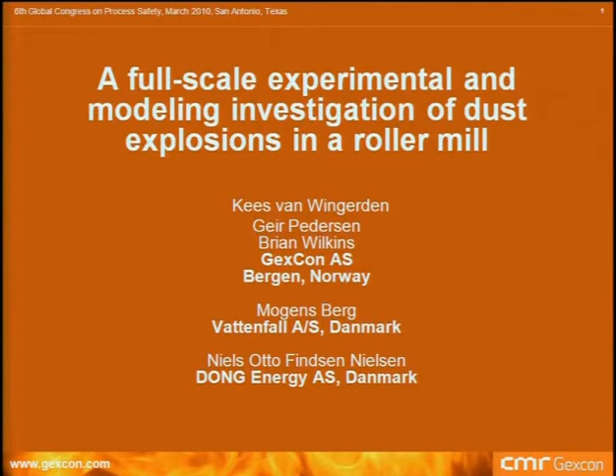I want to say thanks to my co-authors, Geir Pedersen and Brian Wilkins from GEXCON, but also Mogens Berg and Niels Otto Nielsen from Vattenfall and Dong Energy, respectively. Vattenfall and Dong Energy are both power companies. Vattenfall is the Swedish word for waterfall, and they started with hydropower. And Dong Energy, Dong sounds like a strange word as well. It just means the Danish oil and natural gas company, so it's an abbreviation. Nothing special. So there goes everything exotic. I'm sorry.

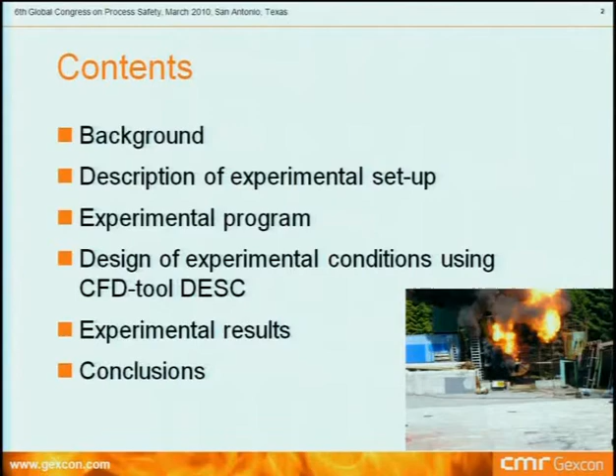I want to give you a little bit of background on why these experiments were performed. I'll give you a description of the experimental setup and the experimental program. We have done some CFD work to design the experimental conditions used in this program. And then, of course, I want to share some experimental results with you and end up with some conclusions from the work we've performed.

As you know, biomass is becoming more and more popular as a fuel for power generation applications to replace coal.

However, grinding of biomass, and the same accounts for coal, represents a hazard due to the presence of both flammable dust and possible ignition sources due to mechanical sparks, hot surfaces, and smoldering combustion. This smoldering combustion may even come from the outside, because the material is stored on its way to the mill at several locations. First it is stored in a ship, brought to a terminal, then taken off the ship and brought into a huge storage silo, and from there it is transported into another silo which is on top of the mill. So there could be smoldering material coming in from the process.

preceding the roller mill. But smoldering combustion can also be generated inside the mill. These companies had some incidents in the roller mill, and on the basis of those incidents, they decided to protect the mill against explosions by using suppression, and at the same time isolation.

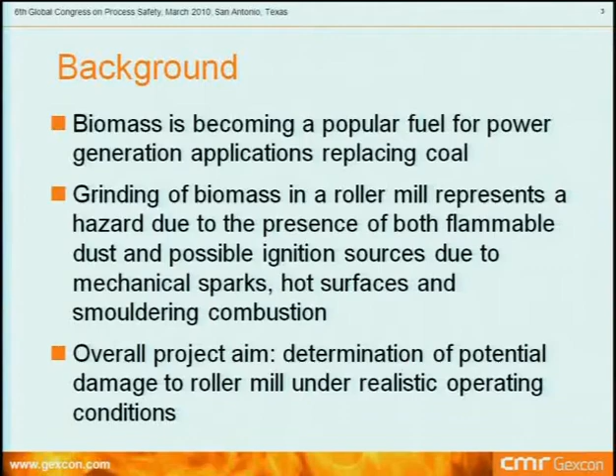We started doing these experiments on their behalf. We have a site outside of Bergen at the island of Sotra, and the power companies made available a full-size Loesche roller mill. It was one which was used in the past, no longer being used anymore, and the grinding capacity of this mill was 36,000 kilos of coal per hour. That was what it was designed for.

The basic parts of the mill are the mill room, and I'll show you some pictures, the classifier area which is on top of it, and on top of that again there is a top with a coal feeder pipe and coal dust pipe. The coal feeder is where the coal enters the mill, and at the same location in the top there are pipes which feed the ground dust towards the burners.

This mill on the experimental site was connected to a 5.1 cubic meter coal feeder via a pipe which was 0.6 meter in diameter and 3.35 meters long.

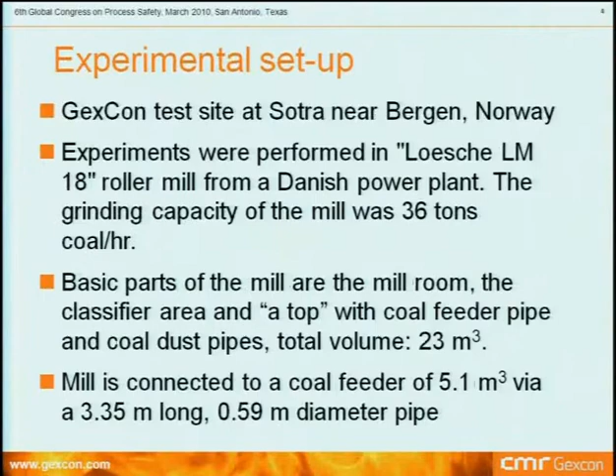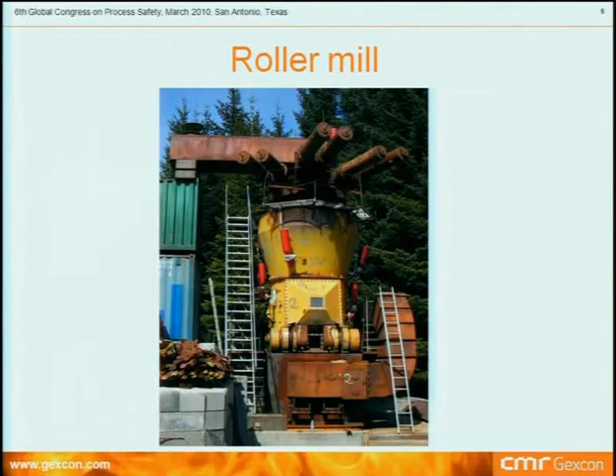So between the mill table, in the bottom of the mill, and the mill housing, there is an open clearance, a throat around it, which has a total cross-section of approximately 0.4 square meters. These coal dust outlets to the burners are 550 millimeter diameter, and as you could see on the picture, 2 meters long. We put this diaphragm in it to simulate long pipes.

On top of the coal feeder, there is an opening which simulates the connection to the silo, as you saw in the picture as well. There were also primary air ducts, fixed to the mill foundation underneath the mill table, and there the primary air is coming in, which is hot.

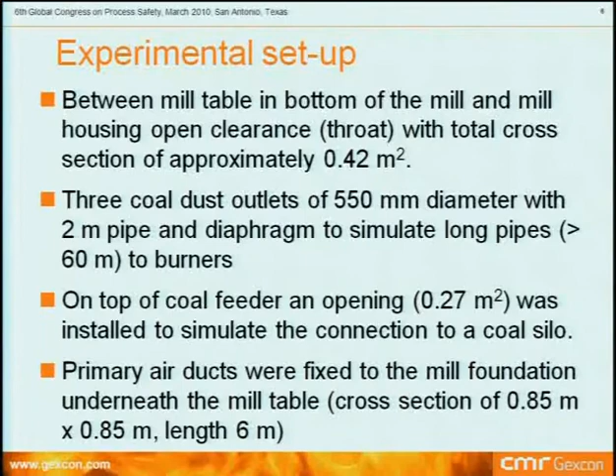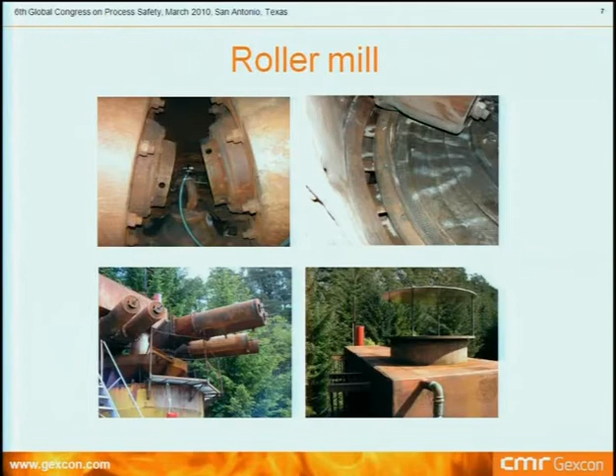We wanted, of course, to use the mill under as realistic conditions as possible. We would need a small power plant to run the mill, and in fact we could just use the mill itself to generate coal dust, enough wood dust to do it ourselves completely. So we would have a small power plant ourselves, but that was too expensive.

So we decided to inject the dust as you would normally have in tests, like in a 1 cubic meter vessel or 20 liter sphere, from a vessel which is then pressurized, and then the dust is injected pneumatically into the mill. For that we used 20 liter bottles, which have a fast-acting valve to open them.

This fast-acting valve is in fact opened by a torque motor, which allows us to reuse the vessels all the time, so it's easy to refill these vessels. They are in fact part of a suppression system.

We did simulations with a CFD code called DESC, from which we chose a 900 millisecond delay time to simulate, I'll say, the worst case operational conditions which could prevail in the mill. I'll show you that in a minute.

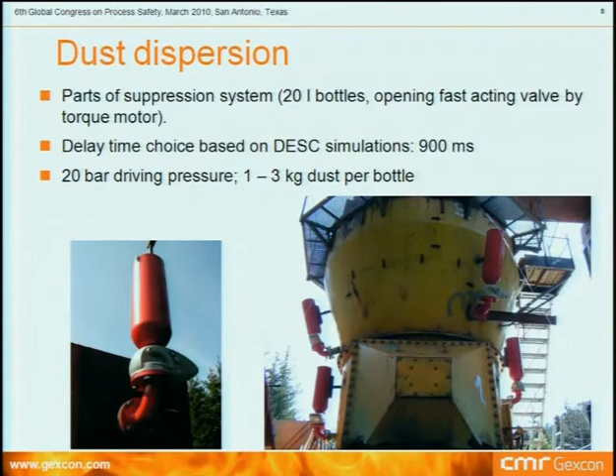And then we had a 20 bar driving pressure, and we use typically 1 to 3 kilograms dust per bottle. So here you see the bottles connected to the mill, at several locations. Here is a closer picture of one of those bottles.

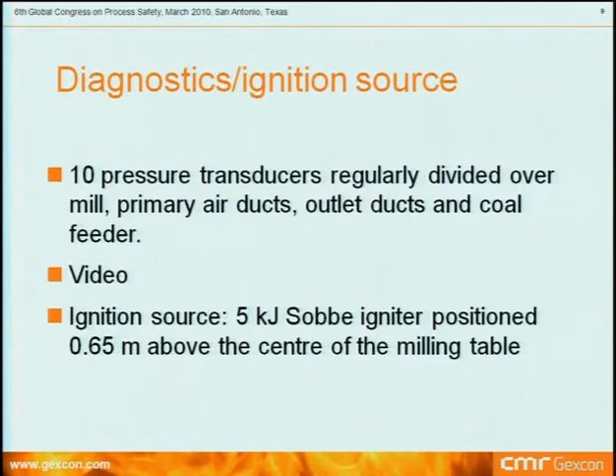We had 10 pressure transducers regularly divided over the mill. We used video, and that was basically it, what we used to diagnose the explosions. We used a 5 kJ Sobbe igniter, which was positioned 0.65 meters above the center of the milling table. You saw a picture of that.

We used coal dust with these properties. It had a KST value of, varying a little bit, 118 to 145. We did several tests during the program to verify the KST value; it varies a little bit. The moisture content of the dust is low, 2%, which is typical for the dry coal going to the mill, because the mill itself is also used as a dryer.

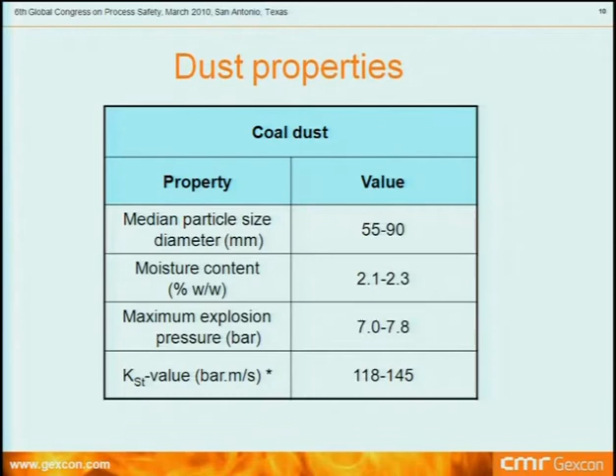As a matter of fact, by using the primary air, which is hot, it's warm air. The maximum explosion pressure of the dust is 7 to 7.8, and we have a typical median particle size diameter varying between 55 and 90 microns. It's microns, not millimeters - that μ turned into a normal M again.

The same happened here. These are the wood dust samples which we investigated, and we had two sources of the dust. The second source is in fact coming from a power plant, whereas the first dust is coming from a furniture fabrication plant.

Which appears to be relatively representative for the dust from the power plant as well. We tested this dust from the power plant for every test we performed, and we ended up with three classes: one where the KST value was close to that of coal dust, one where it was slightly lower, around 90, and one where it was really low, 31 to 55. We determined all these in a 20 liter sphere.

The median particle size diameter is varying, which is the reason why we found these variations in KST value. Also the moisture content is changing, and as you can see, it also varies in the direction of getting a lower KST value because it's a heat sink, the moisture.

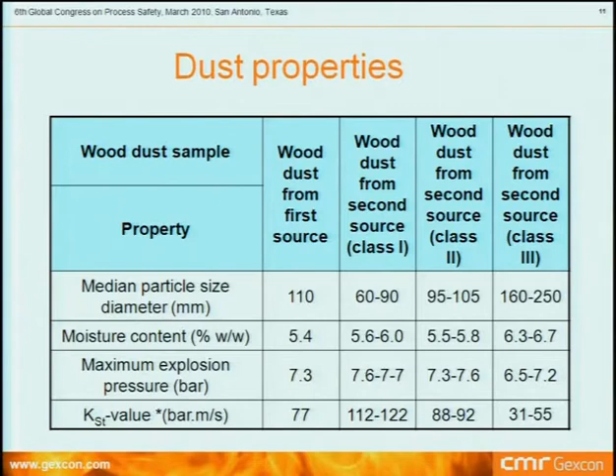These DESC simulations we performed - DESC is a CFD code to simulate dust explosions. The starting point of this code was FLACS, which is a dedicated CFD tool for gas explosions. The only thing we really changed was the combustion model, and we use equations which are adopted for gas explosions, and we can use those for dust explosions as well, as Derek Bradley showed.

The combustion properties are directly obtained from 20 liter sphere tests. And there are some submodels in this DESC code which allow us to describe radiation, the effect of radiation on flame propagation, dust lifting, and also explosion suppression.

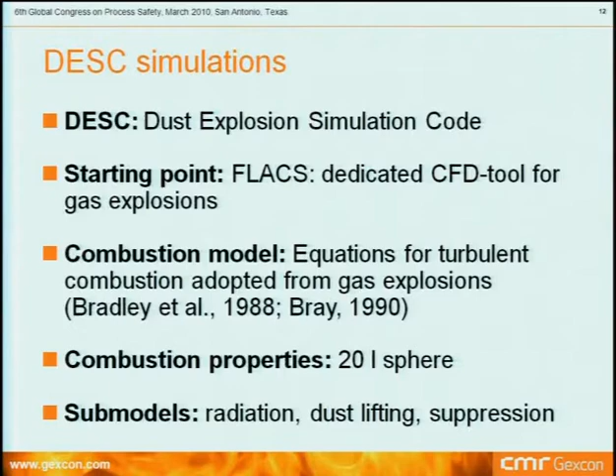This is the geometry of the DESC simulation. The DESC simulations were performed to choose the optimum, or the most realistic optimum, process conditions. We couldn't do experiments with the mill working as it would be used in a power plant, so we tried to simulate that with dust injection. This is the geometry representation of the mill inside DESC.

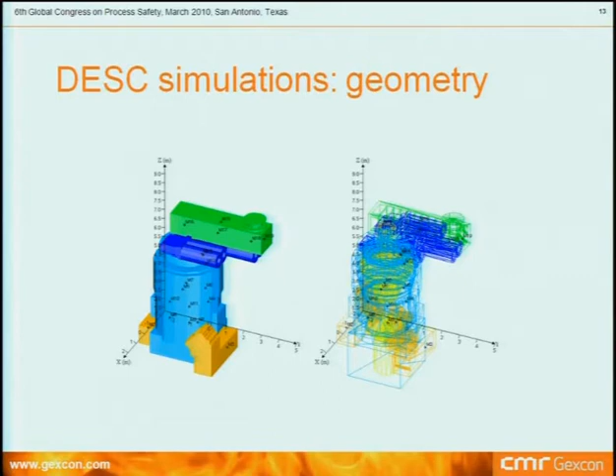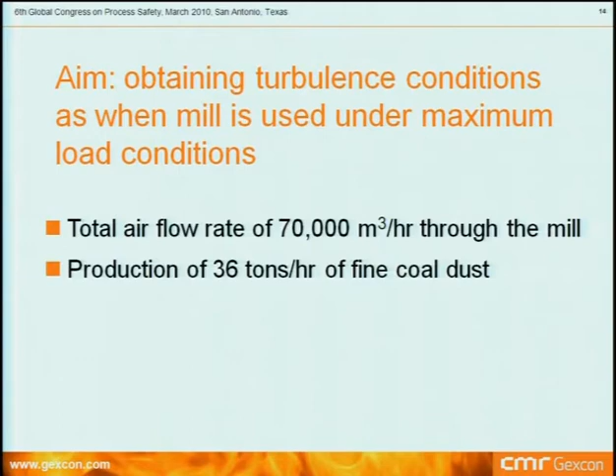The aim of this work was just to obtain the turbulence conditions as prevailing when the mill is used under maximum load conditions. That is basically 36 tons per hour of coal, and at the same time a total airflow rate through the mill of 70,000 cubic meters per hour, which is about 500 grams per cubic meter dust load. Please bear that in mind.

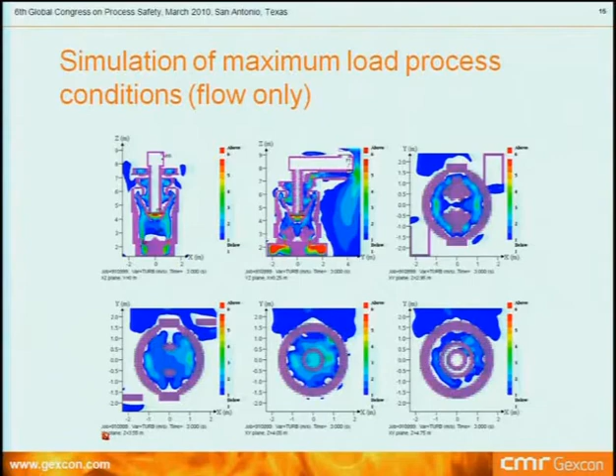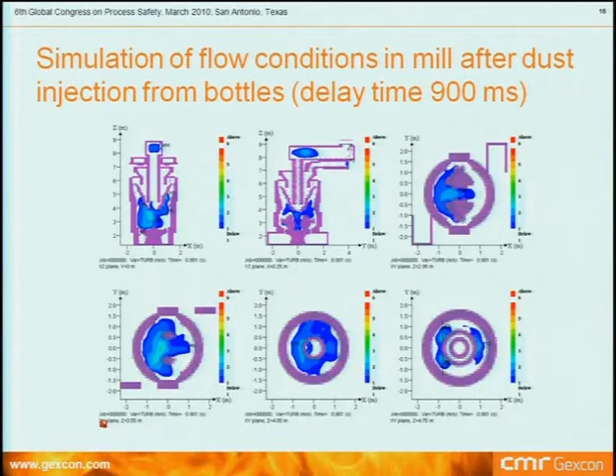Look at the colors, remember the colors. If we then do it again with dust injection, you see that the colors are similar. However, there's nothing outside, of course, because we didn't simulate anything outside of the mill. At the same time there are some differences, but this is the turbulence level after a 900 millisecond time delay, which is close to what was seen in the other simulation. That's why we chose 900 milliseconds.

Now I'm going to share some experimental results with you. We varied the dust cloud size, the location, and the dust reactivity, as you saw. Especially for the wood dust, we were more or less forced to vary the dust reactivity. We also varied the dust type because we did both coal and wood, and we investigated some venting parameters. At least those are the results I'll share with you now.

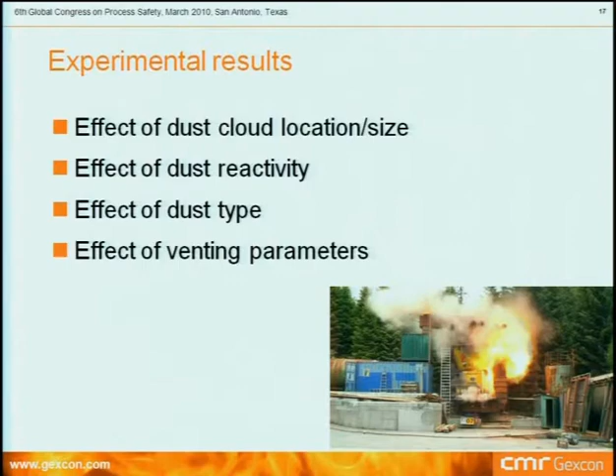Some general observations: we could not do experiments at 500 grams per cubic meter because we saw that we were going to ruin the mill, and we wanted to do a full program. So we stayed at 350 or lower - that was the maximum concentration we could run the tests with, because otherwise explosion pressures would have been too high. We had some minor damage, and if we had gone higher we would probably run into trouble. We wanted to keep the mill for future programs, if any.

We saw big differences between coal dust and wood dust, probably due to the dispersion characteristics of the dust, and I'll show you why. It looks like coal dust rains down more, whereas wood dust stays more in the air and is easier to disperse, despite the particle size distribution being more or less the same. So it's the relative density of the particles themselves, the fuel, which is probably an important parameter. In addition, we had big variations in the wood dust, so we determined the KST value for every single test.

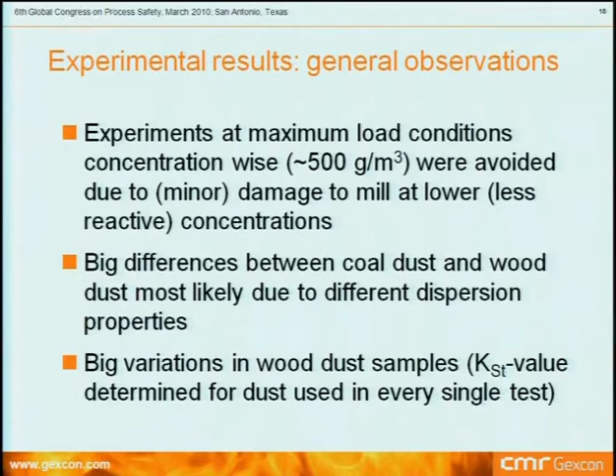Now we want to show you some examples, and fortunately the sound is not very good, so I'll try to get the microphone close to the PC. I think the speaker is there. Are you going to stay there? Yeah, I'm going to show you many things. I do it only for you, Kees.

I appreciate that. But this is the first test where we had a cloud only in the milling part of the mill, and it is coal dust only.

I guess it's coming from here. Okay, well, I'll just take it again. Well, we can try it once more, perhaps it's better.

No, this is a rather mild explosion.

So now we have dust, this test we show now. Dust is everywhere inside the mill, so it's in the lower part where the first one was, but it's also inside the classifier part and in the coal feeder.

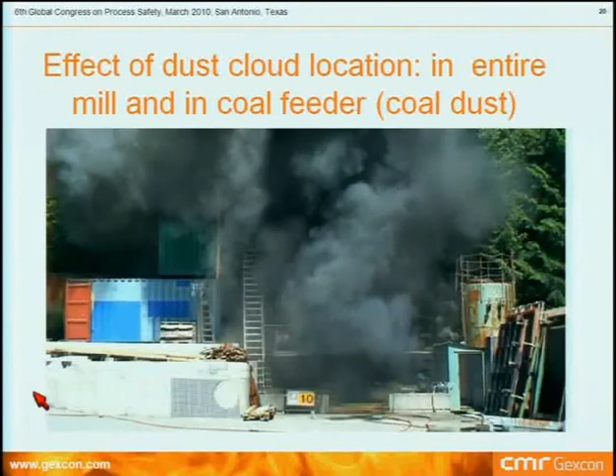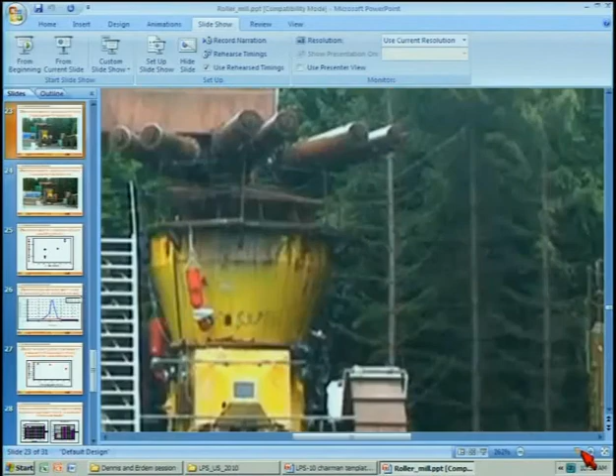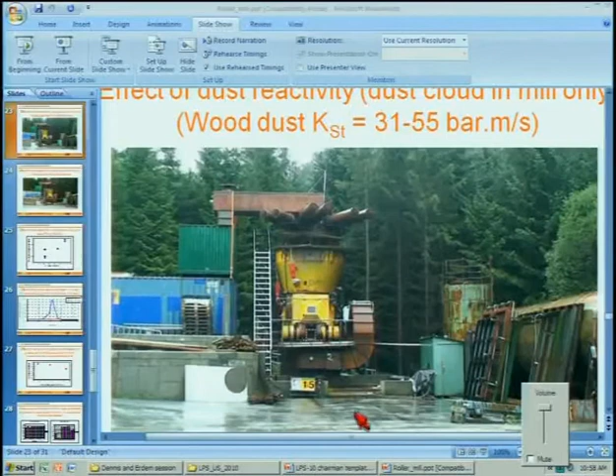I think I understand what is going on. May I? No, I want to get out of the presentation. If we pull that up... no, there's something else. Is there a sound here somewhere? Here, oh it's maximum, okay. Doesn't work, okay, it's a pity. Oh here, there's a button there, we didn't know that. Okay, well it didn't work, sorry about that, I could just keep it over here. It's always nicer when you hear big bangs. As a pyromaniac, I can just assure you that is true.

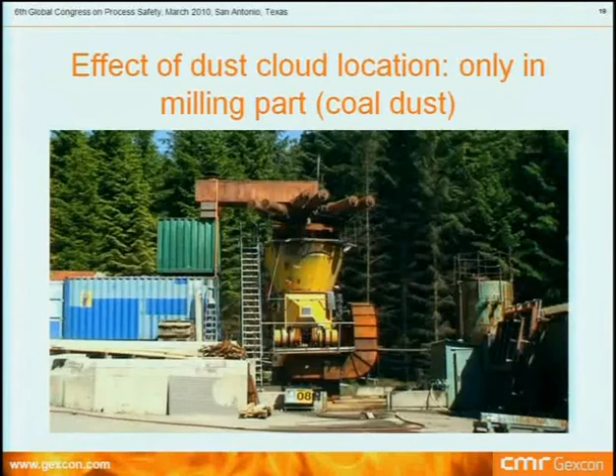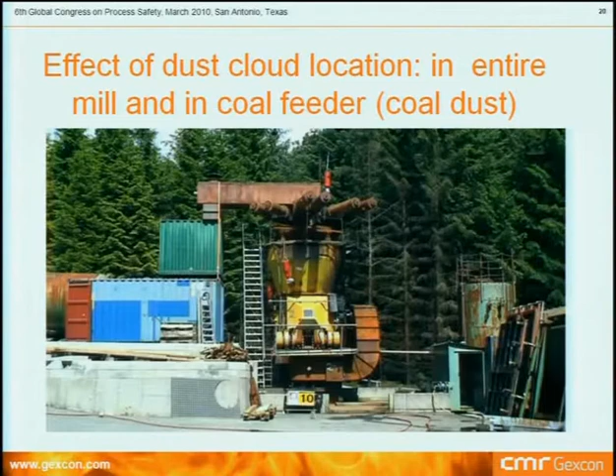Just see where we are now. So we saw the difference between having dust only in the low part of the mill, and the second one where we had dust everywhere inside the mill as well, inside the coal feeder as well.

Here are the pressure measurements of these three tests. One where we had dust only in the lower part of the mill, that is the red one. One where we had dust in the classifier area as well, so the dust cloud was inside the entire mill but not inside the coal feeder. And the last one where dust is also in the coal feeder. You see there is a huge difference - here we measure up to 1.35 bar inside the mill.

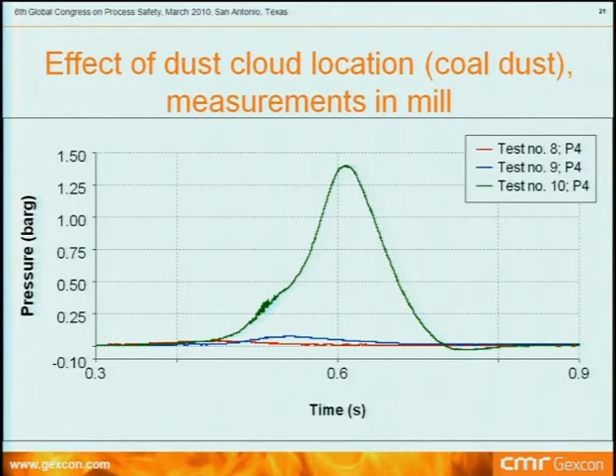So it gets complex and interesting when you do this, and this is happening in many tests. But it's also interesting to see that the coal is giving hardly any pressure inside the mill if we have only a cloud inside the mill. It's completely different from wood dust, because then the pressures are more or less similar in conditions similar to test 9 and test 10, where we have material inside the mill only and inside the mill and the coal feeder.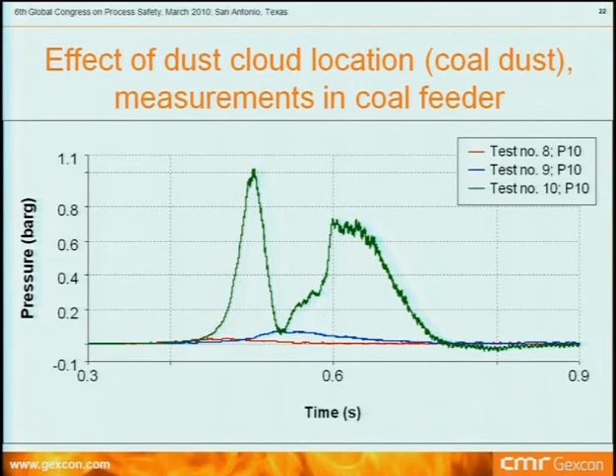So this different behavior must be due to the behavior of the particles themselves, the dispersion behavior of the dust. Now we'll see some experiments done with coal dust and wood dust. First, this is wood dust, where we will just vary the dust reactivity - wood dust only inside the mill for every test. Unfortunately, you don't hear the sound.

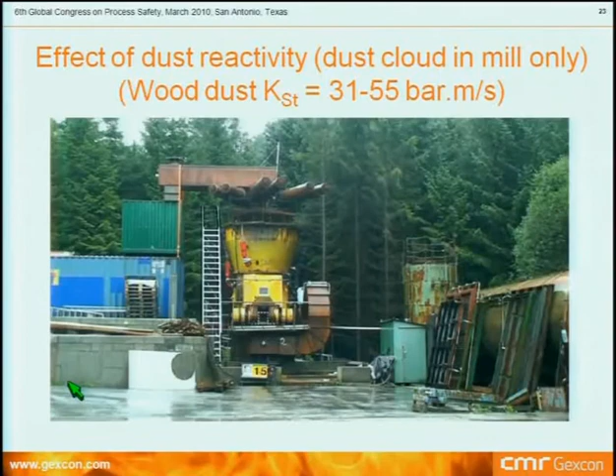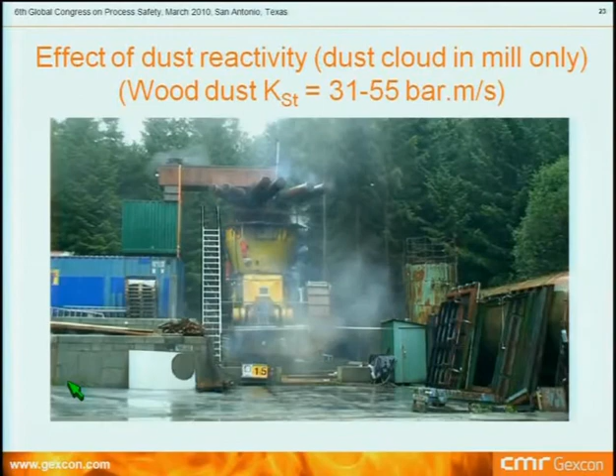So this is wood dust, low KST value. Then with a somewhat higher KST value,

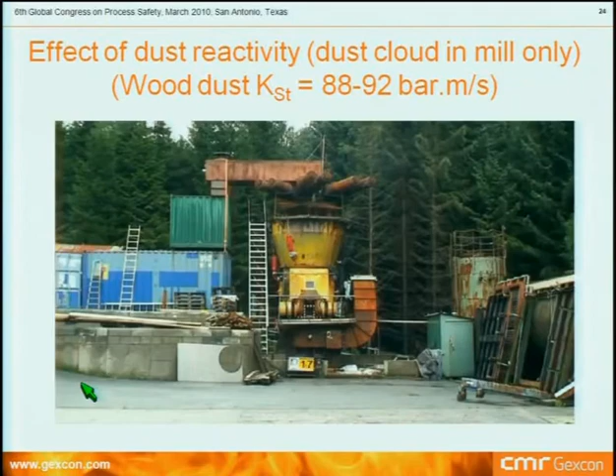If we then plot the maximum explosion pressure measured somewhere in the mill as a function of the KST value, we see this relationship. As you would expect, an increase of the pressure with the KST value. If the KST value is low, we see big variations and low pressures, and if the KST value goes up, we see the pressure increases, which is of course as you would expect.

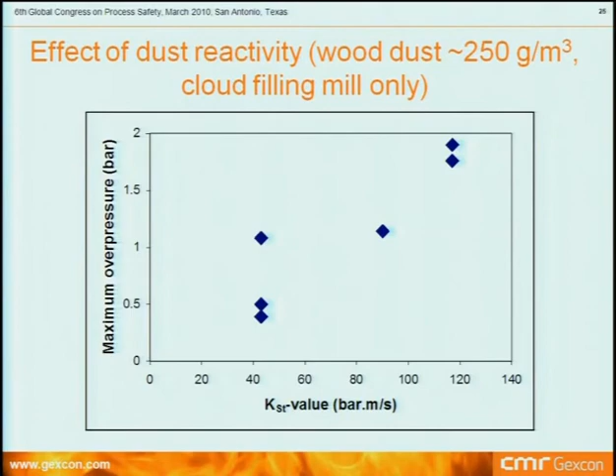And this was all done for 250 grams per cubic meter, where the cloud was filling the mill only.

I mentioned this difference between coal and wood. Here we see coal and wood dust, which have in fact more or less the same K value. The only difference is that the K value at 250 grams per cubic meter, where we did this, is different between wood and coal. In fact, the coal is more reactive at this concentration than the wood.

But in this test, where we had material only in the mill, we see that the wood, in spite of giving a lower K value, has this pressure going all the way up to 1.7, whereas the coal dust gives hardly any pressure, typically 0.1 bar. This difference is due to the dispersion characteristics of the dust, because the wood dust stays much longer airborne than the coal dust. The coal dust rains out.

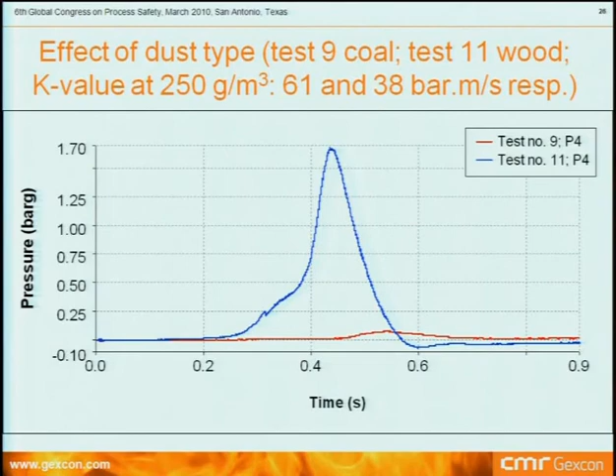We also did some experiments where we varied the vent opening size in the top of the coal feeder. The coal feeder, which is in fact outside of the mill but is communicating with the mill, had a vent opening on top, and we varied the size of that vent opening between typically 0.03 all the way up to 0.27, which is the full opening.

You see that, in fact, that vent opening, although it's far away from the mill, if we only have dust inside the mill, has quite an influence on the pressure inside the mill. Although it is communicating through a pipe, it has quite some influence on the pressure inside the mill. So venting is important, although it is not venting as you would normally have it - it's venting through its connections to other equipment.

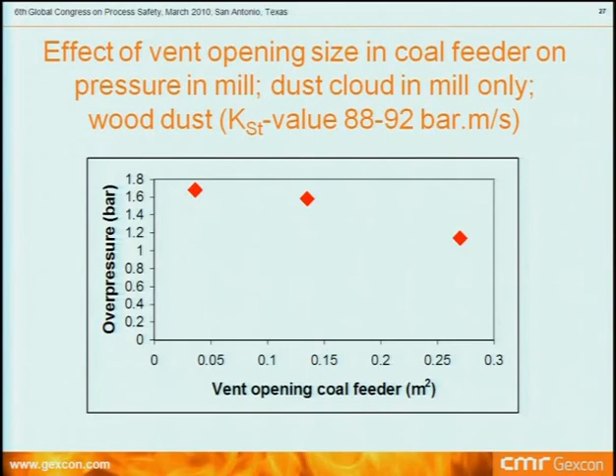But of course, bear in mind that this was an explosion in the mill only. If we would have had an explosion in the coal feeder as well, which was not the case, although of course some dust will be pushed inside the coal feeder, this picture may have been different.

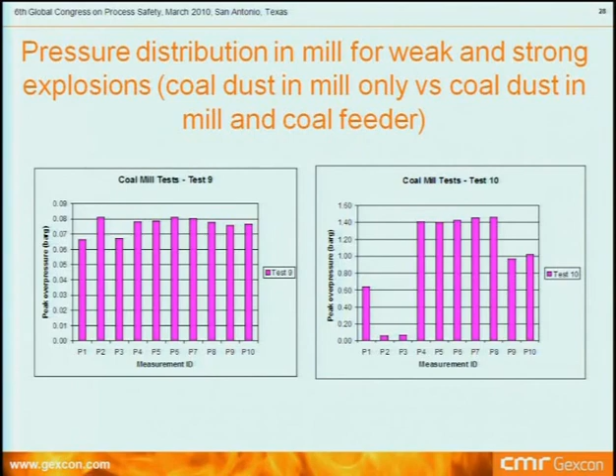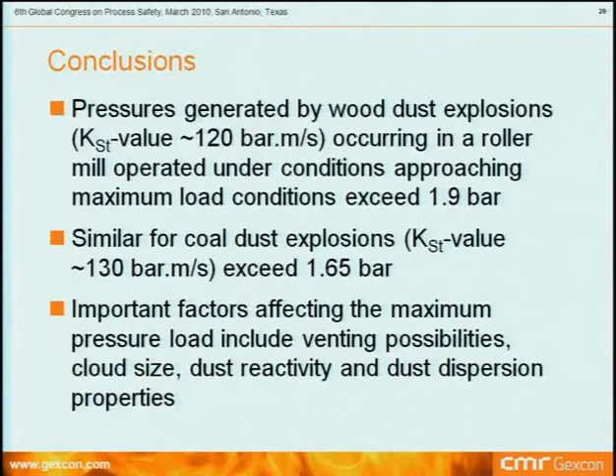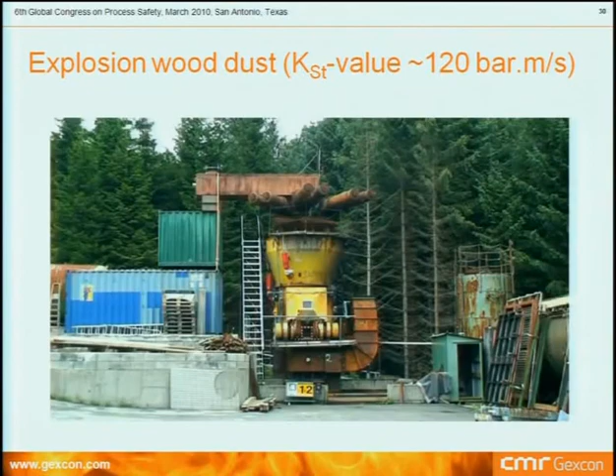Okay, in the end, I want to show you one. Unfortunately, there is no sound, but this is the explosion which caused most damage with wood dust. Well, it doesn't give sound here, so unfortunately it doesn't work that nicely. Hopefully I started it - yes, it starts.

This gives, in fact, the maximum pressures. But the mill is still there.